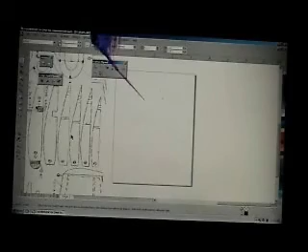I've got all these programs here. You can see that one. That's one of my former ribs that I traced off of the prints. So we'll go ahead and open up the print file. So there you can see my ribs for the wings. We're going to go ahead and start with one of those. I'll move it over here so you can see it.

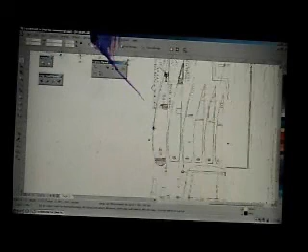We're going to trace this out, and the reason we've got to trace it out is because as I zoom in you can see all these little bumps. That laser's going to cut all jagged like that, so then you'd have to sand, and it kind of defeats the purpose of having it laser cut.

So what we'll do is we'll come over here and show you this too. I got my formers. You can see that one right there. It's only the one side, so I only trace one side, then I copy it and flip it, and then you've got the same thing on both sides.

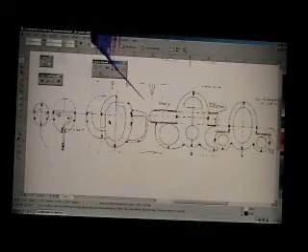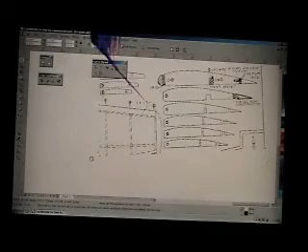And so we'll zoom this out, start with the wing rib, move it over here, and then we'll rotate it so that we're looking at it right side. And now we'll zoom back in and rotate it a little more. Right about there. Oh, we'll rotate it again. Get it fairly square, it doesn't really matter. So we'll zoom in onto this rib.

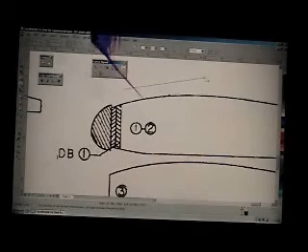Now we're going to go up to some of these drawing tools, and we're going to start with the 3-point curve. I'll show you what that does here. You can see my marker. You click and hold the click, and you bring it over, and you see it's drawing that line. When I let off the click, now I can make a 3-point curve any shape I want. So I'm going to use that to get my shape of the airfoil.

So we'll undo that line, undo, create 3-point curve. Now I'm going to zoom in here right there so you can see my little cursor, I think, yep. And so we want it right about there, and before I click I'm going to zoom back out so that I can see the whole rib.

And click and hold. Now I'm just going to do a rough one. I've already made this rib, so I'm just going to do this rough so you guys get an idea how to do it. You bring it right over to the end, and now I got that curve, see? And I'm going to put it right there. There it is, right on the line. And now I got that line there.

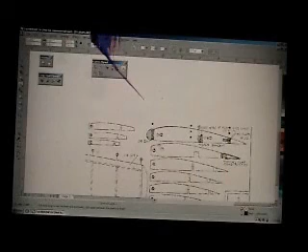So I'll come down here and do another 3-point curve on the bottom, because there's a slight curve right there, you can see. So I'll start that, click it there, draw my line, bring it over to here, and then get it so it looks fairly good. Click. So now that I got that, we'll come over here to the freehand tool.

And you want to start on the node, connect the dots, and the node means it's the end of the line. So you click, bring that down, let off. Oh, that's pretty crooked because you're supposed to click and let off, so undo edit, and we'll do that again. You click and let go on this one. If you click and let go, you can bring that line wherever you want it. If you click and hold it, it draws whatever line that mouse makes.

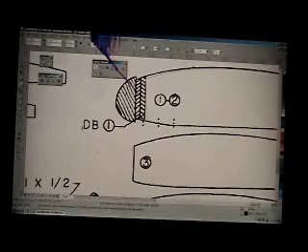So connect that line to the node, zoom back out, come over here, and now we're going to do the bottom of the wing. Click and hold. You can see I'm dragging it over here, and I'm going to put it right on that node. And right there. Zoom in on it. So, looks like it's connected. If it's not, we'll fix that up.

Now we're going to do this little notch out right here. And come over here. Rectangle tool. We've got rectangle, circle, pentagon, all kinds of different tools over there. So I'm going to use a rectangle. You can see it draws you a nice rectangle.

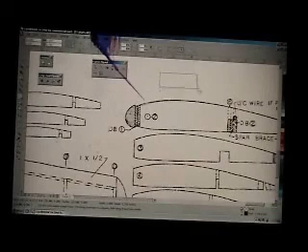So we'll do that, and then I'll show you a trick here. Let's say I want that rectangle to be whatever size I want. You go up to the top of the screen and you select it, and I'm going to make it 0.5 inches by 0.25 inches, and it'll make that rectangle that size. Now when I hit enter, boom, it just resized it for me.

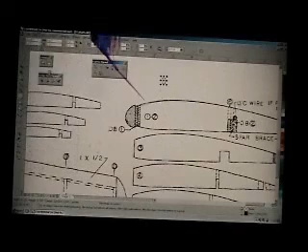Now that it's selected, I'm going to hit copy, and then I'll come over to edit and hit paste. Now there's two of them there. I'll zoom in on it. Now you can see just the rectangle. Go over to my selector tool. There, see, I got two of them. So you can do that and you don't have to sit there and draw the parts over and over.

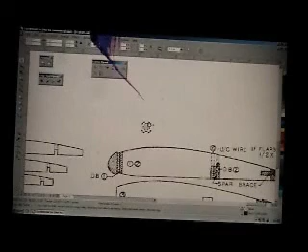So now that I have that, I'm going to grab one of them. I know it's not the size of this notch over here, but I'm just trying to show you guys how I'm doing this. I'll put that one on the notch right there. And then this one, I'm going to rotate it. We'll zoom in here so you can see it better. Get it centered in the screen.

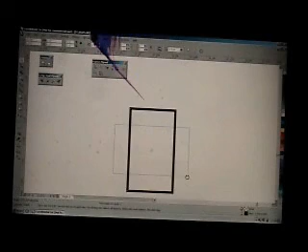As you click, you get an option to skew it so I can resize it, or you click again and then it gives you the option to rotate. So I'm going to rotate it. And there it is, lines are square. Zoom back out and click on it again so that it gives me the move option. Then I'm going to go ahead and move it back here.

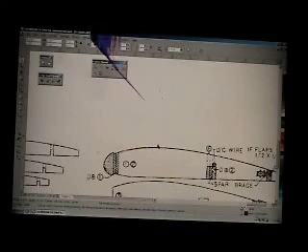Alright, so that's that. I've pretty much traced that rib out. So now I can select my scan and move the scan out of the way. And there's my rib. So we're going to do a couple quick things. Here we got the rib. And I'll show you, see how that line is? That line is smooth. Zoom right on it. It's a smooth line, so that laser is not cutting jagged edges.

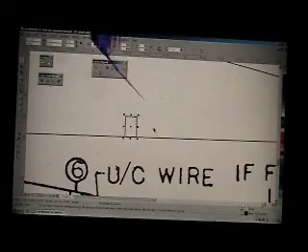So the next step is you want to come over and make sure all these lines intersect before you combine them. So I'm going to pull this down, and the lines are intersecting, and that's just going to help us when we go to edit it as we combine this object. Oh, you can see I forgot a line. So come over here, see if you guys can see it. Yeah, the nodes are just too small, you can't see it on the screen.

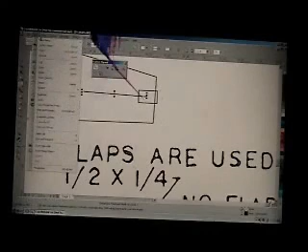So click, now bring it down. That's my rectangle, and connect it to that node. Now you got it there. So now we'll zoom back out and move this box. Oops. Get rid of that line, undo, edit, and hit the selector tool. And now we're going to move this over.

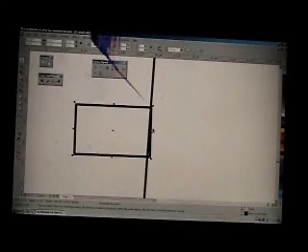This is a quick drawing. It takes a little more time to do it than this because you got to get everything square. You can see that this isn't square here, but that's because I'm just doing a real rough sketch of it, just to show you guys how it works out. Now that I got all that in there, and let's say those are all the size I want them and where I want them, I've got a measuring tool in there so you can measure everything.

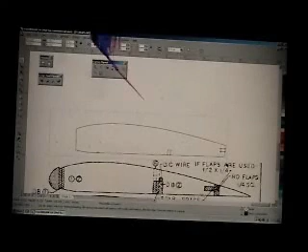We're going to come up here and select the whole item. Now it's selected as one, and you come up to arrange and combine. Now it just combined all those lines as one unit. Now we want that laser to come up in here and cut that notch out. We don't want this line. So you come over to your crop tool flyout, virtual segment delete,

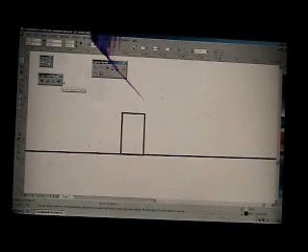and zoom in on that. And we're going to cut that line out. And then right there is where we want it. See that? Cut that out for us. And then you cut this one out. Oh, sorry, let's do it there. So when you come across that, you come over here, hit your selector tool. And now you can see some lines